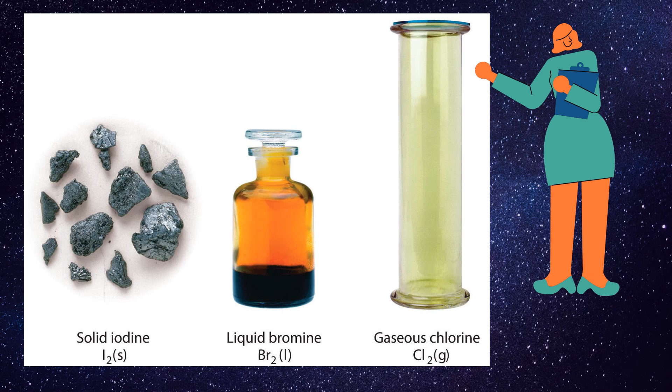Pure substance is a substance that has a fixed chemical composition throughout. It may exist in more than one phase. For example, water, a mixture of liquid water, carbon dioxide, nitrogen, and a mixture of gas. Figure 3.1 shows nitrogen and air as a pure substance.

And figure 3.2 A shows H2O, which consists of vapor and liquid, as a pure substance. But for the air and liquid, the second figure, it is not a pure substance because the air is in gaseous state.

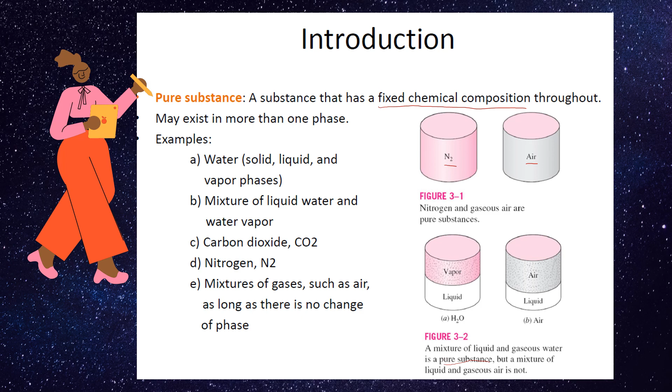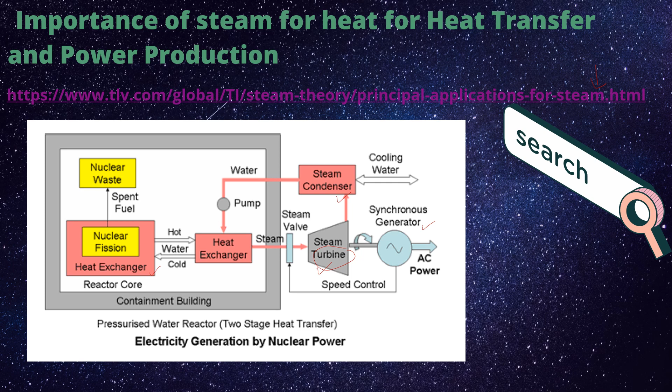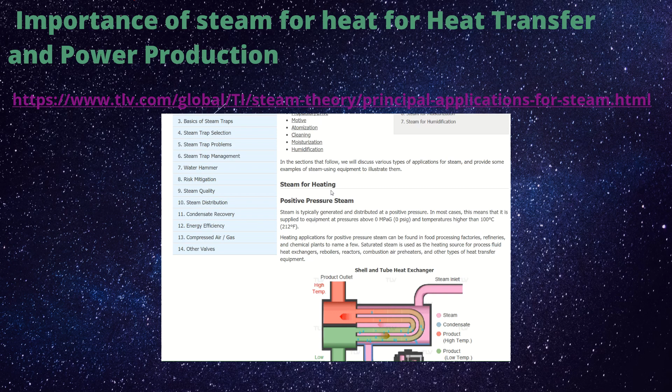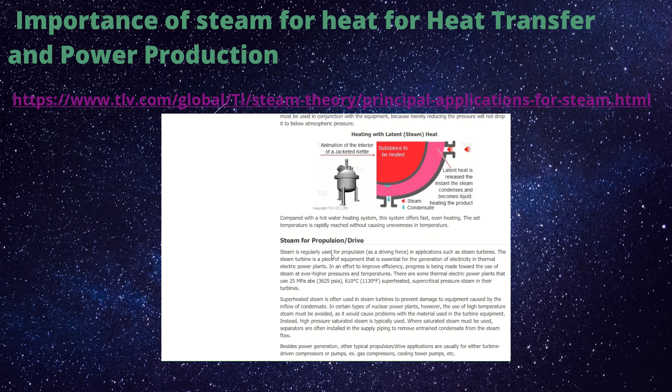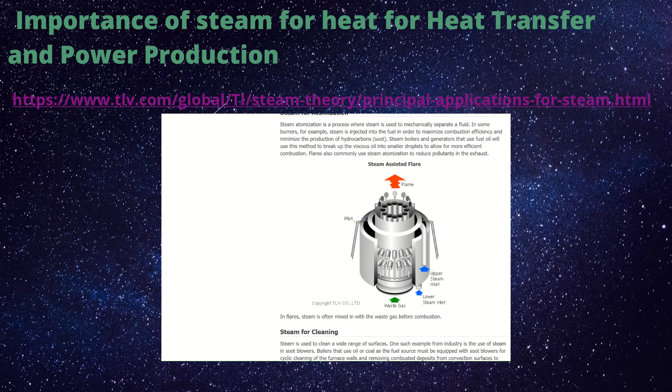Here are some applications for steam. Steam is used in a wide range of industries like heating, propulsion, motive, atomization, cleaning, moisturization, and humidification. For example, steam for heating as positive pressure steam and vacuum steam, steam for propulsion drive to generate electricity, steam as motive fluid, steam for atomization, for cleaning, for moisturization, humidification.

So if you want to read more, you can click the link in the slide, and if you have any question, you can ask your lecturer for detailed explanation.

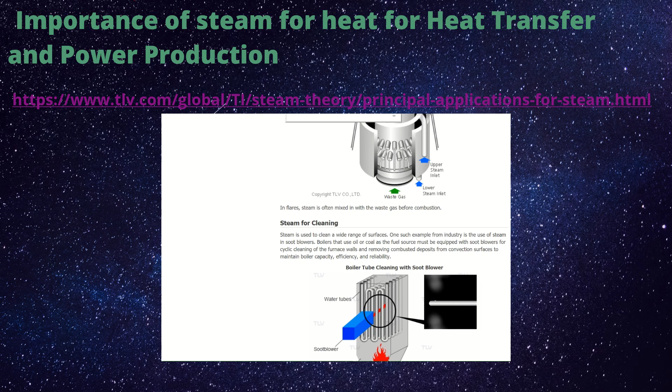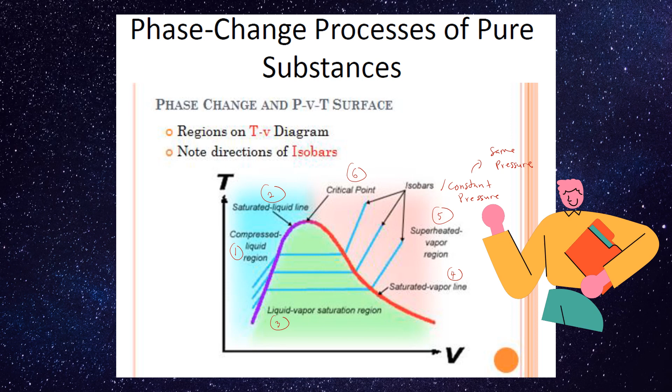So the difference between PV and TV diagram: for the TV diagram, we have T for the y-axis, and the x-axis remains the same as PV. And the other difference is the line. For TV we have isobar, but for PV we have isotherm. So the shape is different.

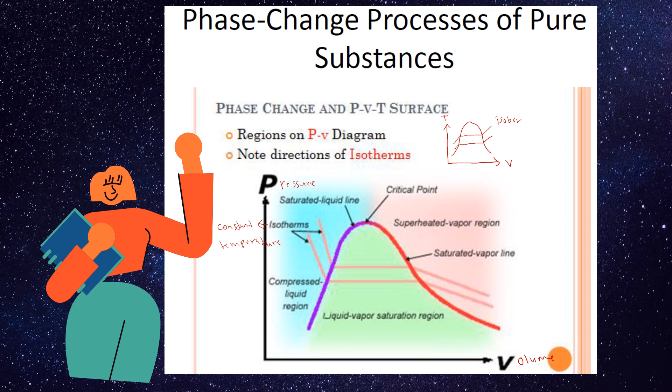So when the heat is supplied to the system, the water is ready to vaporize. That state we call saturated liquid. For example, for water the boiling point is 100 Celsius. At that state, 100 Celsius, we call the water saturated liquid, because after that, the saturated liquid changes to liquid vapor mixture.

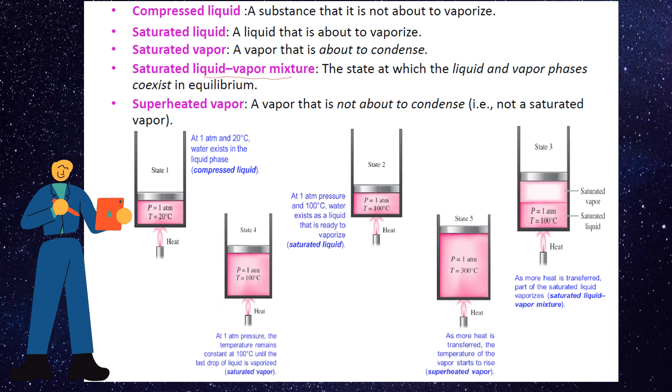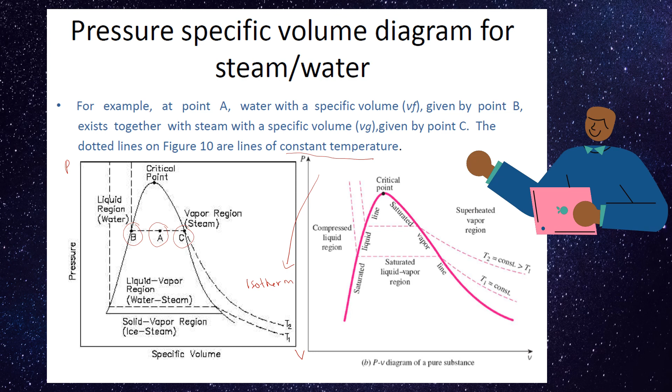Okay, the phase for B is saturated liquid. The phase for C is saturated vapor. Otherwise, A is a mixture of liquid and vapor. So for the properties of a wet mixture, or mixture of liquid and vapor, we have dryness fraction. Why do we have dryness fraction? Because the phase is a composition of liquid and steam. So how to calculate the dryness fraction, whose symbol is X? The dryness fraction means mass of dry saturated steam divided by total mass.

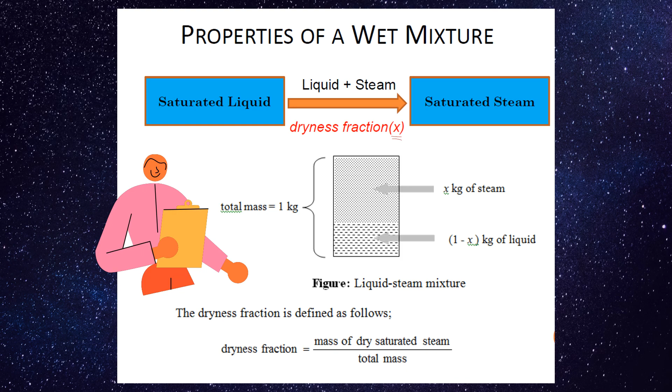Okay, for example, for this point, let's say X is 0.2. That means the saturated steam is 0.2 and the saturated liquid is 0.8, because the dryness fraction means mass of saturated steam divided by total mass. So for this point, X is 0.8, which means saturated steam is 0.8 and saturated liquid is 0.2.

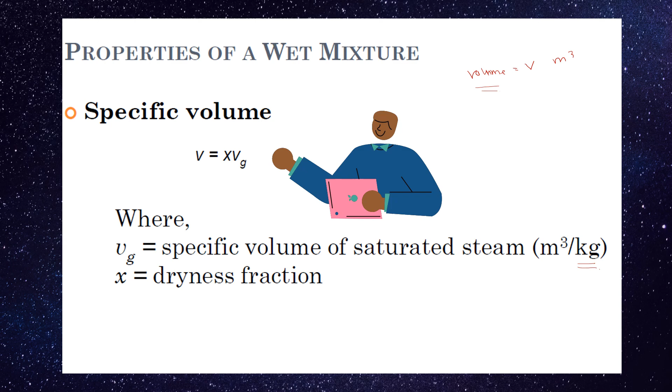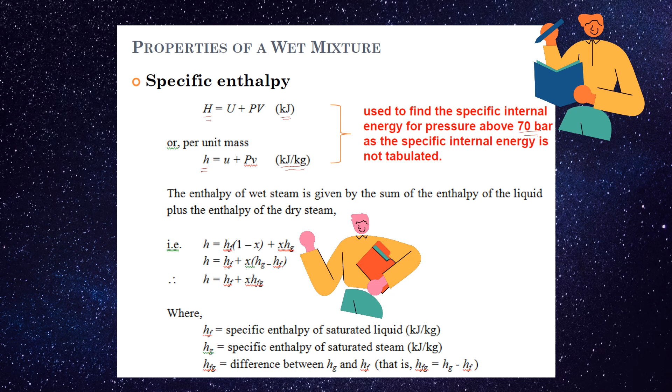To calculate the specific enthalpy, the formula is H equal to HF plus X HFG. HF is specific enthalpy of saturated liquid, and Hg is specific enthalpy of saturated steam. And then HFG is the difference between Hg and HF, meaning Hg minus HF. X is dryness fraction.

The other property is specific internal energy. So how to calculate the specific internal energy? The formula is UF plus X times UG minus UF. UF is specific internal energy of saturated liquid and UG is specific internal energy of saturated steam. But in the steam table, we do not have UFG. So you must calculate UG minus UF because we don't have UFG.

And then the last property is specific entropy. So the formula for specific entropy is S = SF + X·SFG. SF is specific entropy of saturated liquid and SG specific entropy of saturated steam. So the formula is given with SFG because in the steam table we have SF and SG, so you do not have to do a manual calculation for SG minus SF.

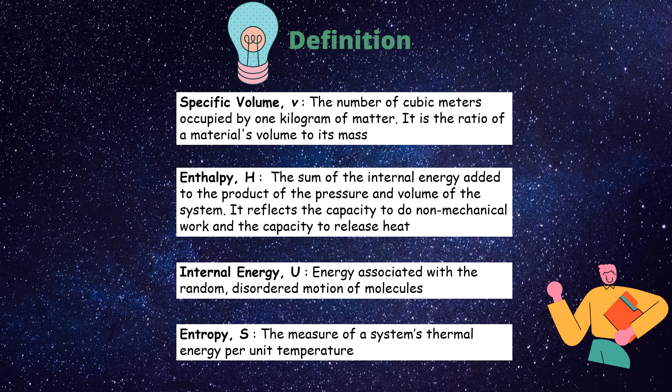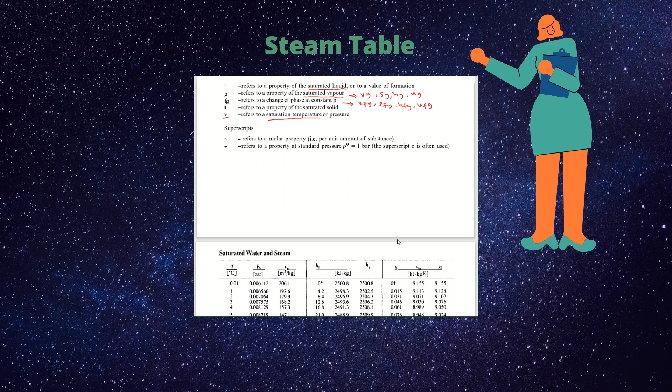As explained in the page for notation and units, saturated liquid refers to F. F means fluid. G is gas. So the question asks about the specific enthalpy, H, for saturated liquid. Saturated liquid is F. So the question asks about HF at 20 bar. So you find P equal to 20 bar and read the HF.

So we go to P equal to 20 bar. Here is 20 bar. And then find the HF. Where is the HF? HF is the sixth column: 1, 2, 3, 4, 5, 6. Okay, here is the HF. So HF is 909 kilojoules per kg. Okay.

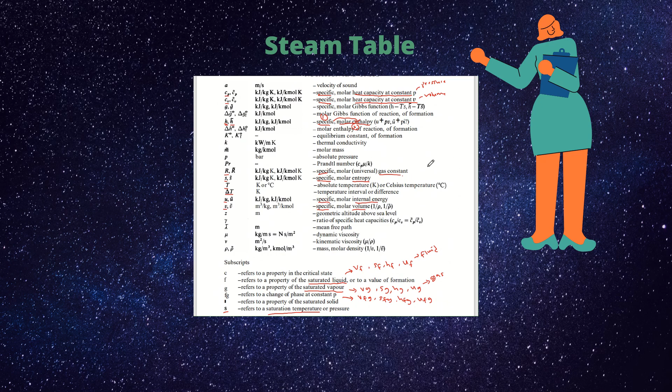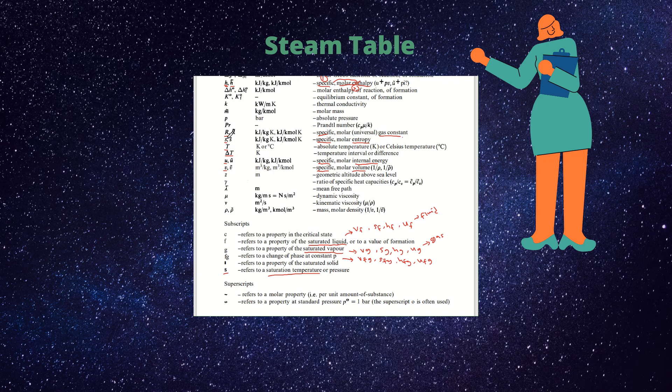Okay, another question. Find entropy at P equal to 10 bar for saturated vapor. So if you forget what saturated vapor means, you can refer to notation and units. It states that saturated vapor is G. G refers to gas. So VG, SG, HG and UG. So for entropy, the symbol is S. So the question asks about SG.

Then find the P equal to 10 bar. And after that, find the Sg. So Sg at the last column here. Okay, 6.586. So the S equal to 6.586 kilojoule over kg dot Kelvin. Okay. The steam table also has the unit. So after you write down your answer, you must include the unit.

Okay, so the steam table has 1, 2, 3, 4. Okay, 4 pages for saturated steam. This one is 4 pages: 3, 2, 1. Okay, so don't forget for saturated steam, water and steam, it has 4 pages, and after that it is about another phase, which is superheated steam.

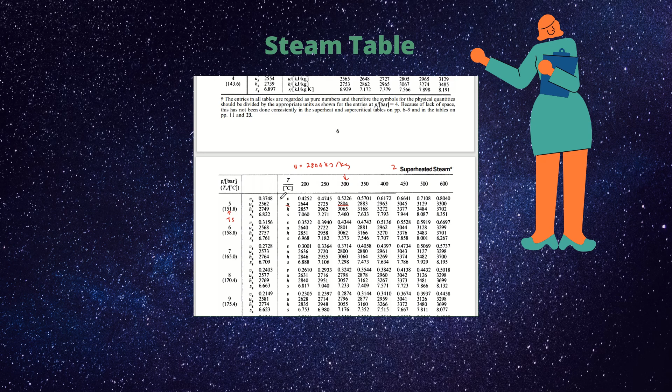But for the superheated steam, okay, this one is page 1 for superheated steam. This is page 2. And then, okay, at page 3. Before this, I have explained about the exception about the internal energy, that at 80 bar and above, the internal energy cannot be read directly from the steam table. As we can see here, here is 80 bar. Before that is 70 bar, which has the U. But for 80 bar and above, the steam table doesn't provide the U.

So how to find the U, internal energy? You can use the formula that I have explained before, which is H equal to U plus PV. Or in specific internal energy, small h equal to u plus Pv. Okay, as an example, if the question needs to find the U for P equal to 90 bar and T equal to 400 Celsius, we need to use the formula to find the U.

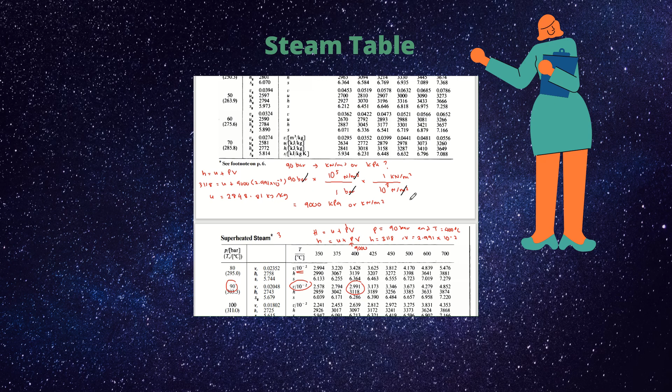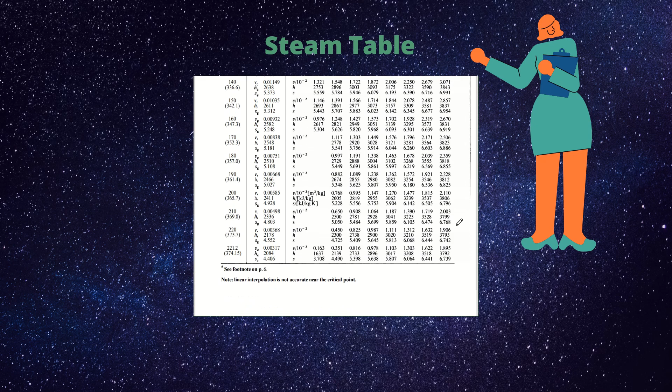Because if you can see here at page 2 for superheated, the V does not have 10 power of negative 2. But for this page, for V, we have 10 power of negative 2 because the value of V is less than the previous page. The V is smaller than the previous one. So, don't forget to put times 10 power of negative 2. Okay, so we have the pages for superheated steam.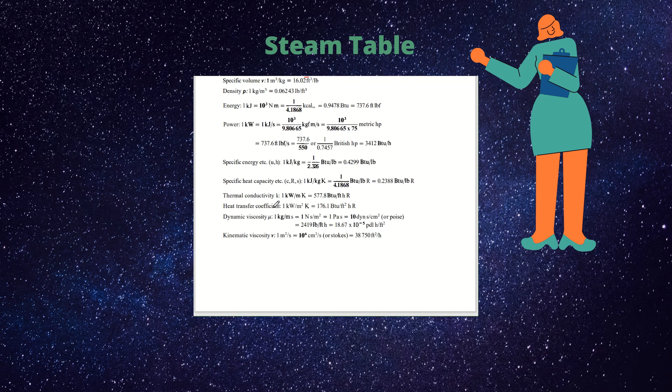Other than that, in the steam table, you can also refer here in this box for the value R, Cp and Cv. Also the gamma, Cp over Cv. All these values we will learn in the next subtopic for ideal gas law. If you forget what Cp, Cv, R are, you can refer to the notation and unit as I explained before. So this is the approximate calculation for air. Usually, we use this value when the question does not give a value of R, Cp, Cv and gamma for air.

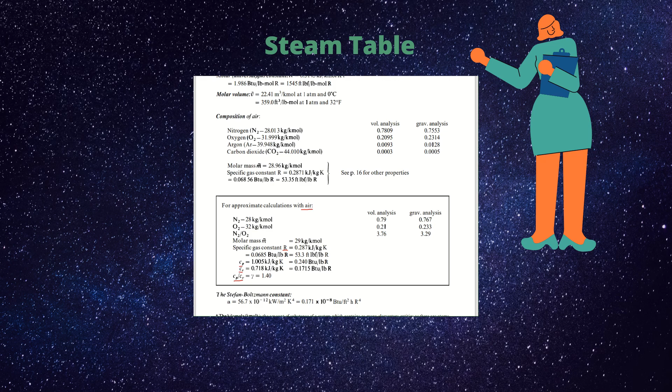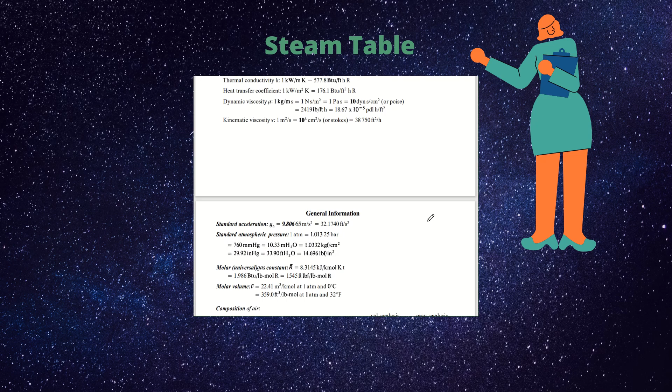Okay, so that's all for the steam table. After this, you can explore on your own to help you understand more about the steam table.